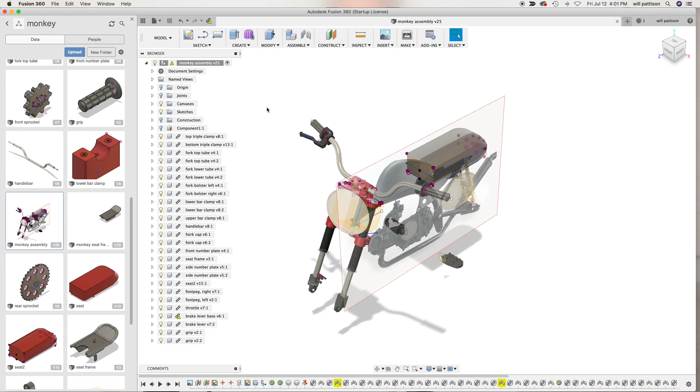Okay, let's give this a whirl. Let me first show you some parts that I've already built and talked about on my YouTube channel, so some of you might be familiar with them. This project is for my Tamiya 1/6 scale Honda Monkey, and there are quite a few parts that I wanted to customize. Not only did I not like the kit parts, but I wanted to create something totally different. So that's what's happening here. What you see in front of you is an assembly of all the parts that I've created, and they are basically referenced in space according to this reference photograph.

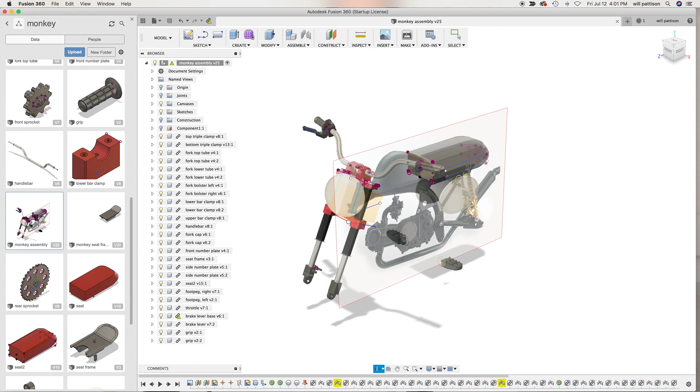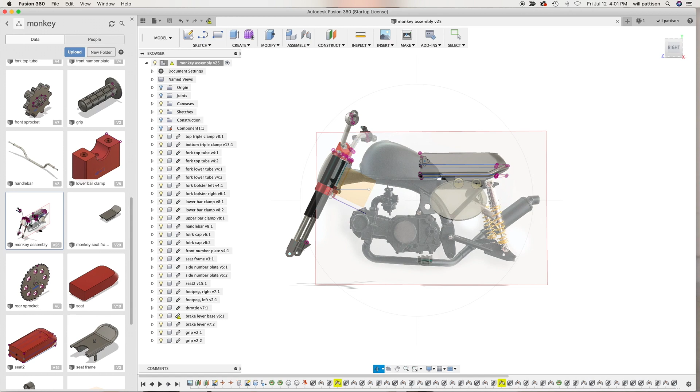This is one of the cool things you can do with Fusion 360: you can import a JPEG of whatever it is you're trying to create a model of, or use as a reference like I've done, calibrate it to the correct size, and then do your modeling around that. That's basically what I've done. Now, an assembly is basically just a collection of individual parts. If I zoom in here, you can see there's quite a few parts: fork tubes, triple clamp, lower triple clamp, fork bolsters, handlebars, grips, and you can see all of those individual parts over here.

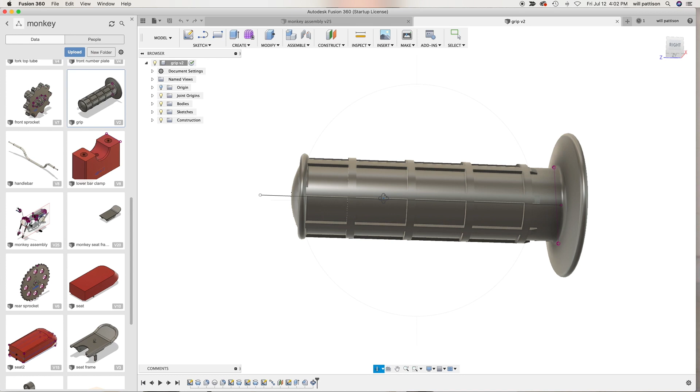So basically what happens is you design each part. Well, there's two ways to do it. One way is to design the parts individually and then join them in the assembly later. That's a pretty straightforward way of doing it. I'm not going to get into showing you how to create an assembly with this quick overview, but suffice it to say that what you do is you make these little references.

Like you can see right here, I've got a funny message from John Geigel. He runs Masterpiece Models, and we text back and forth, and I'm not going to read whatever it was he wrote there, something about lotion. That might be embarrassing. Anyway, you can see that there's a little reference point thing in here, that sort of happy mouth circle thing there. That's an assembly reference.

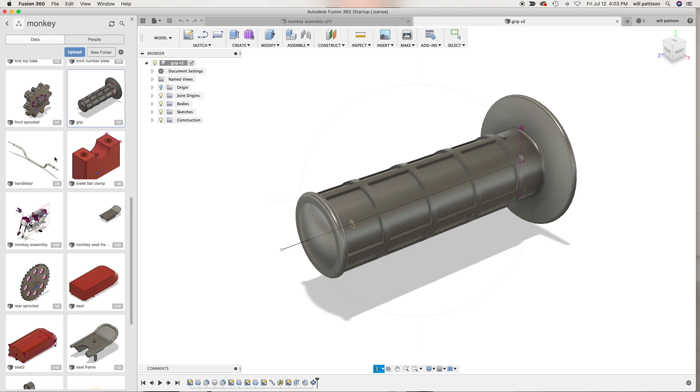What will happen is you'll mate that assembly reference with a similar assembly reference on the part it's supposed to attach to, which in this case is the handlebar. You can kind of see what's going on there. You just put the thing together the way it normally would go together, putting those mate references in so the parts join at the appropriate location.

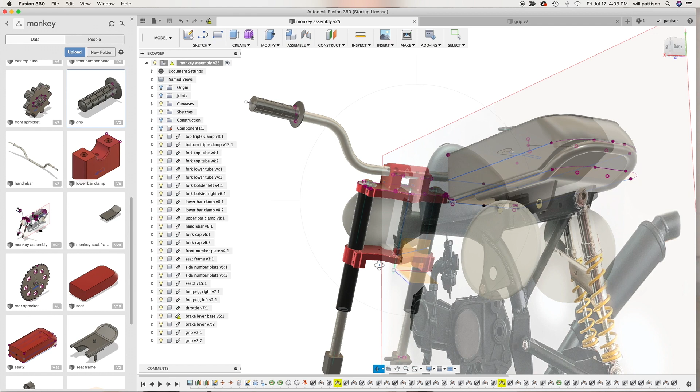But that's a whole other subject, don't want to get too sidetracked. I just wanted to show you how a collection of parts that you build works when you make it into an assembly. Now, the other way of modeling in an assembly is to actually create the assembly and model everything in situ.

So I would have had an assembly where I would have created the handlebar first. Then I would have had reference points on the handlebar that would have allowed me to start building the grip component. That can get a little bit more confusing, not exactly what I'd recommend for beginners. Assembly modeling is a separate subject, and that can be learned on one of the many YouTube videos available for Fusion 360.

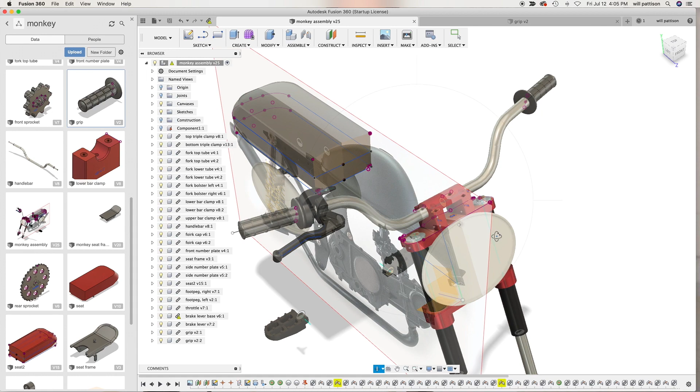The bottom line is it's not something most of us as scale modelers are going to have to do a whole lot of. I did in this case with this project because I was basically building the entire front end of this little motorcycle, so I had a bunch of parts that were going to have to go together. But if I had just been building a single component, I probably would have been able to just create it all by itself, and that's what I'm going to show you right now, how that basically gets done.

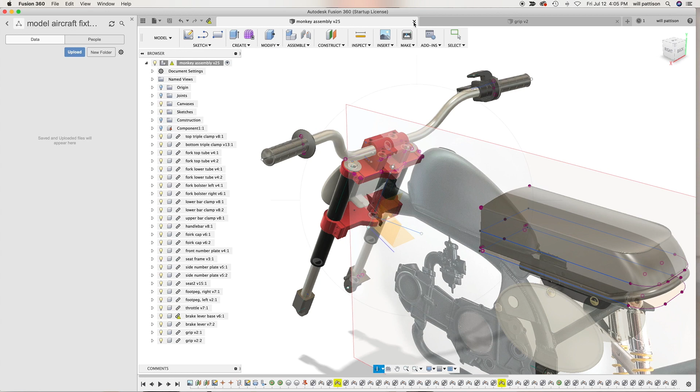So I'm going to go back over here to a folder I've just created called Model Aircraft Fixture. This is a new project I want to start on, and I need to close these things out real quickly. Okay, what I'm going to do is create a new component, a new design. It doesn't have a name until I save it, which we'll do momentarily. But this is the basic process of creating a part.

You also have to know that all the units and everything are already set up. Once you set it, for example I'm modeling everything in millimeters, and those are already set, so I don't have to turn all that on each time. What I just did there was turn on the origin. This is basically the point in space with an X, Y, and Z axis, and you can see that up here, and that references the part. Now if it's a standalone part, it's not super important where you start, but it's good to have a consistent practice of how you model things.

I always do it looking at the thing the way it would appear naturally. So what I want to make is a little L-shaped bracket. What I have to do first, and this is the way you create all parts in Fusion 360, is you start with a sketch. Since this is going to be an L-shaped bracket, I'm going to create a sketch on the side, on what would be the side plane of the bracket. So that'll be this sketch right here.

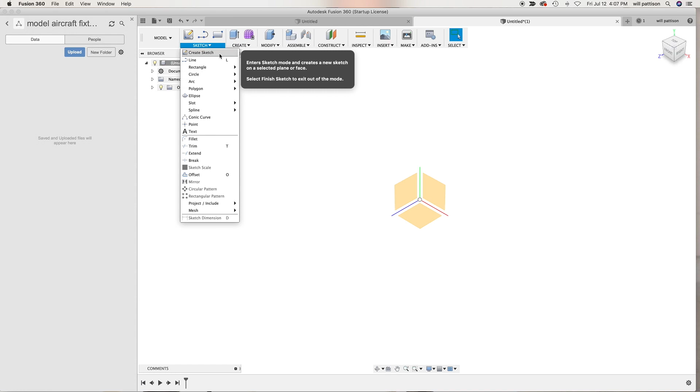So I go here and tell it I'm going to create a sketch, and I select the surface or the plane that I want to make the sketch on. You can see my units here are in millimeters. Now it's not super important at this point that I get everything exact, and you'll see why.

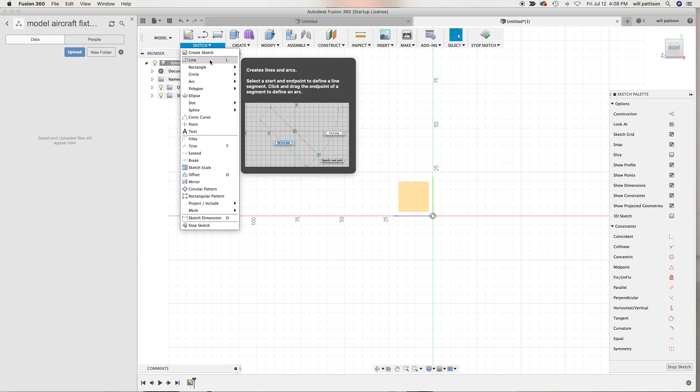So what I'm going to do now is start sketching some lines. You can go here in the menu and select line, or you can use the L key. I'm going to just start right here and go, and I'm drawing. You can see it shows you the dimensions of the line you're creating, and you just keep going and connecting lines, clicking on each end point.

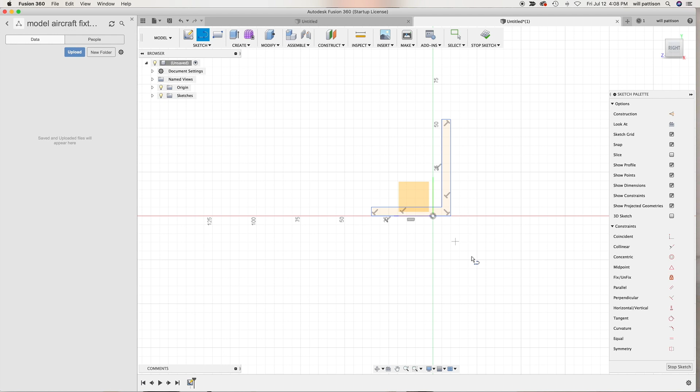Okay, so now I've completed a sketch profile, and you'll notice that everything is blue, and what that means is that it's an unconstrained sketch.

Now that's important because this type of CAD or 3D modeling, or whatever you want to call it, is parametric modeling, meaning the object is defined by a series of parameters or dimensions, and I don't have any on there yet. So if I were to modify this...

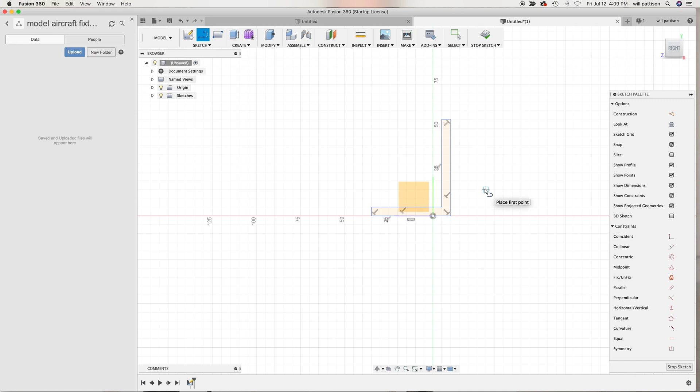it would not hold its shape, which is typically what you want when adjusting dimensions on something. So in order to constrain this, I need to add some dimensions. I'll hit the D key, and now I can put a dimension on that side. I don't really care yet exactly how big it is—we'll make that 5 millimeters. Now we'll put another dimension here, hit return, same thing with this.

Okay, now I have essentially dimensioned this entire L bracket, but you'll see that it's still blue. Why is that? Well, because it's still floating in space—it's not attached to the origin, which is this dot right here. So I need to do that in order to give it an actual location in space.

Now you can see that part of it has turned black, but part is still blue. That means the parts still blue are yet to be constrained. So what I'm going to do is pick a constraint. I'll hit escape, go over here, and pick constraints. What I want is a coincident constraint.

So I click on that, and I'm going to make the origin coincident with that line. Now what that basically told it is that this bottom edge of the L bracket must pass through that origin, and now you can see the entire sketch is black. That means it's a fully constrained sketch, and ideally that's what you always want.

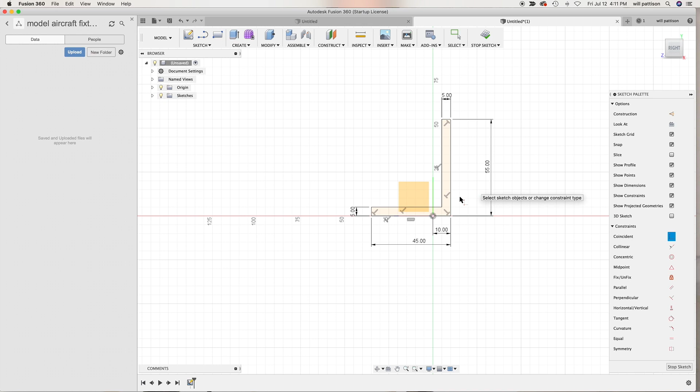So once you've done that, you just go here and stop sketch. All right, so now you can see in 3 dimensions that I have this sketch. Now if I want to turn it into a solid object, what I have to do is go here to create, and I want to extrude that thing.

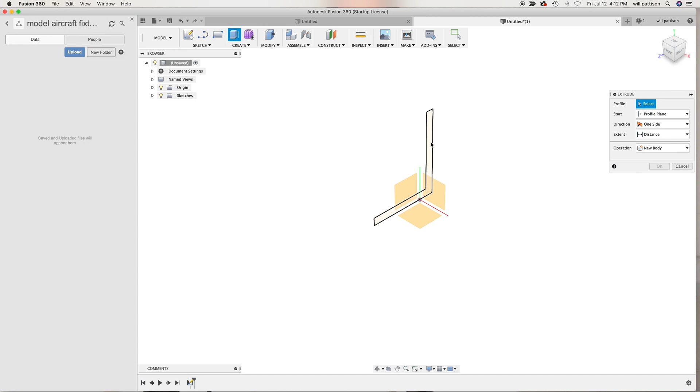So now it wants to know, what is it that I want to extrude? I want to extrude this profile. All right, this is where it starts to get fun. So now, how far do I want to extrude it? Well, how wide does the bracket need to be? All right, let's say 35 millimeters.

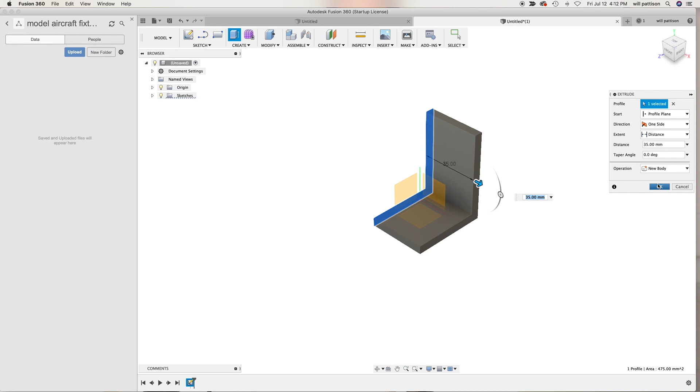That's fine. All I was doing was grabbing and dragging this arrow right here. I could have just as easily entered the dimension there or over here, but dragging the arrow is a lot smoother and faster. I'm not going to explain all these individual little boxes here—that gets into way too much detail. But suffice it to say, now I have created this little bracket.

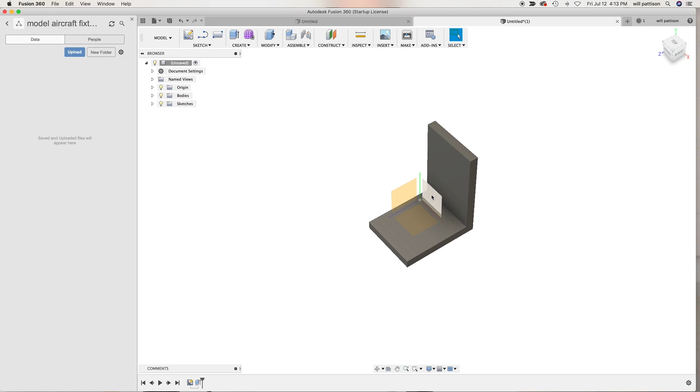Okay, so super cool. Now let's say I want to put... I'm going to need a hole in the bottom of it right here on this face. So there's a couple different ways I can do that. I can go here and create a hole, but I'm going to show you the basic bulletproof way of doing it.

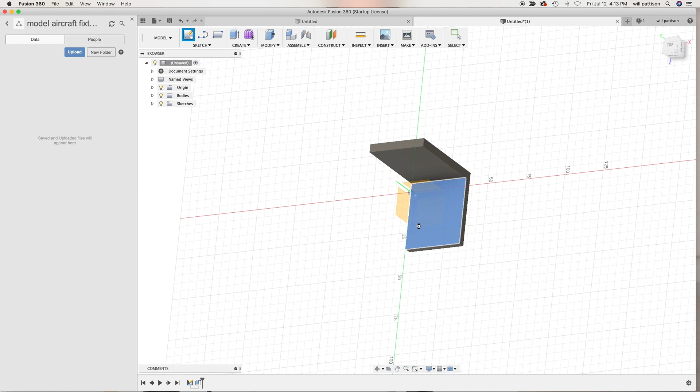We're going to create another sketch, and this time it's going to be on this surface. Now see it automatically rotates to the orientation that allows me to look straight down on that surface.

I want to create a circle, so I hit the C key, and I'm going to just create that. I don't know how big it needs to be, let's call it 10, so I'm just typing in 10 millimeter, and there we go. I have a circle there, but you can see it's totally unconstrained.

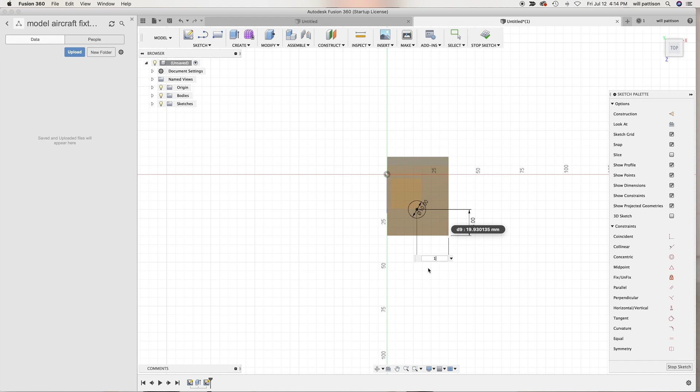So I'm going to hit the D key. I'm going to dimension from the center of the circle to that edge, and let's make it a nice round number of 15. Then I'm going to go from the center of the circle to this edge, and again we'll make it, let's see, that was 35. We want it to be in the middle, so 17 and a half. And now you can see that the circle is completely constrained.

So I'll stop sketch, and I'm ready to now go here, and I want to create an extrusion. Now you may say, wait a minute, how is it going to be an extrusion if it's going to be a hole? You'll see.

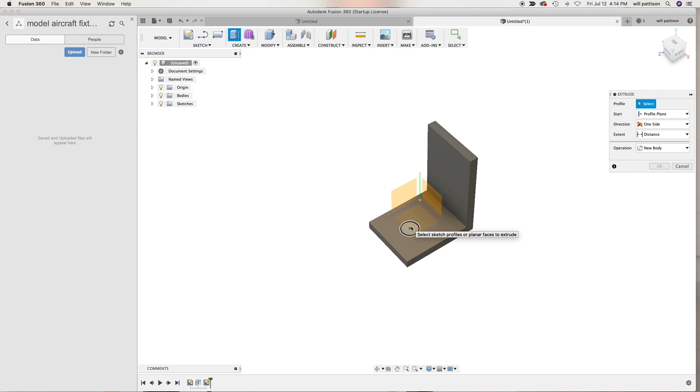So I'm going to select that profile. Now look right here at my operation. It can be a new body. If I did that, I would have a little cylindrical nub sticking out of that surface, and that's not what I want. I want to make it a cut.

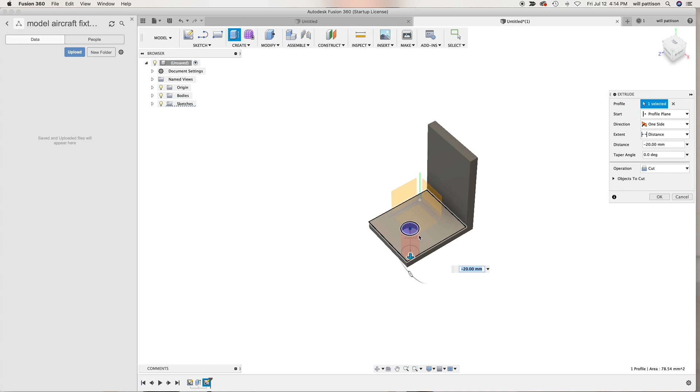Now I'll just take and drag that arrow the opposite direction. Doesn't really matter how far as long as it goes all the way through. Say OK, and boom. Now there is a hole in that bracket.

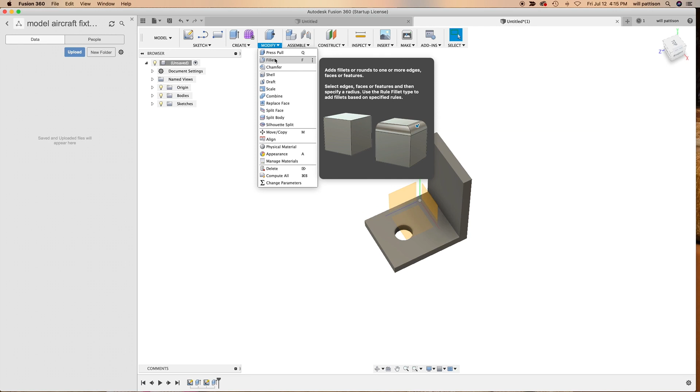Now, if I want to clean the bracket up and make it look more dope, let's say that I need to put some fillets on it. So I go over here, fillet command, and let's say I think I probably need a nice radius on the inside of that corner. How much of a radius? Let's say 2 millimeters.

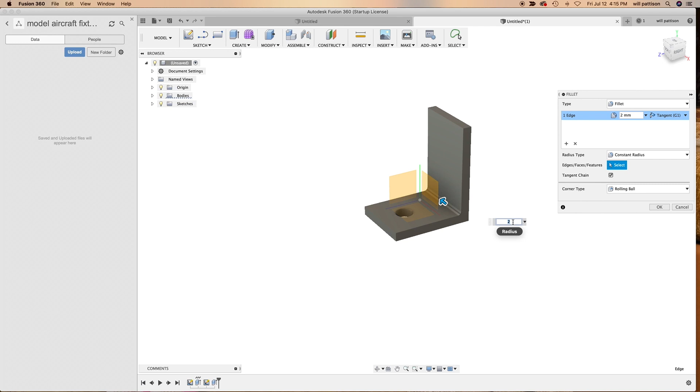It'll show you what it's going to look like, and you can rotate it there. I'm using this on a Mac, and that's one of the great things about this, since it's web-based, you can use it on any platform. But the reason I mentioned that is because my controls don't work exactly the same as yours might if you're on a PC. But let's make it a 5 millimeter radius, that looks more cool. So there we go, 5 millimeter radius.

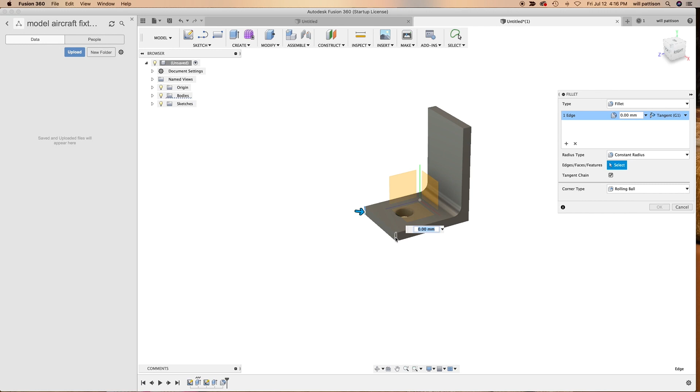Now let's say I want to put a radius on these outside corners. So I'll go back again, or I can just hit the F key for fillet. And I'll click that one, and that one, and that one. Whoops, don't want that one. Let's unselect that, then reselect that edge. And I want these to be 3 millimeter radii. So, and then I'll click OK. There we go, that is a neat little bracket.

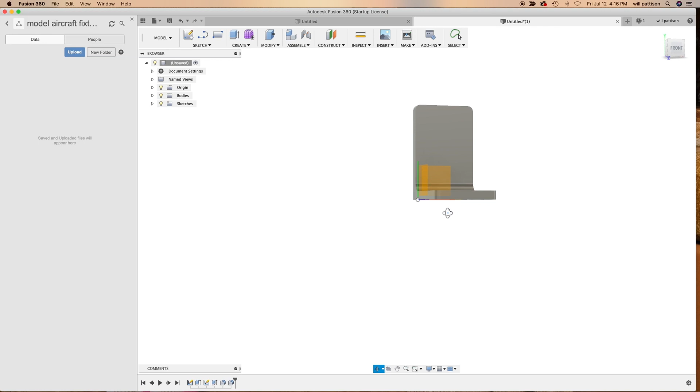It's obviously going to need, I think it's going to end up needing a slot in this face. So let's do that real quick. That's a little bit more challenging.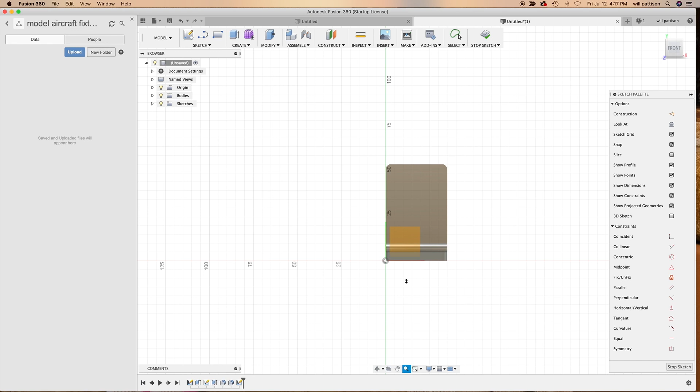Okay, let's create a sketch on this face here. Now this is going to need to be a slot. So I think a good thing to start with is a rectangle. So I'm going to hit the R key, and it's going to let me automatically define a rectangle like that. I don't think that one's going to work.

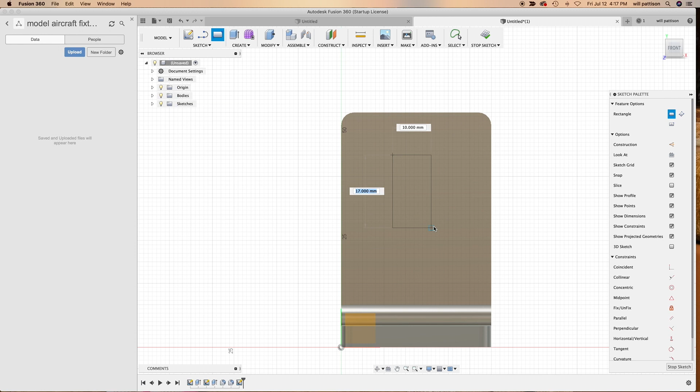So I hit escape to get out of that. Needs to start a little further down. Whoops, don't do that. R key, start a little further down and do that. Okay, and click. So now I've got a rectangle of some arbitrary size, but it's going to be a slot for a screw.

And so it needs to have a radius on the top and the bottom. So I'll go over here and I'm going to sketch an arc, and I'm going to go from center point. It kind of knows that I want that center point to be in the middle of that line segment, so I'll click there. Then I'll click here, and again, it's going to kind of help me out.

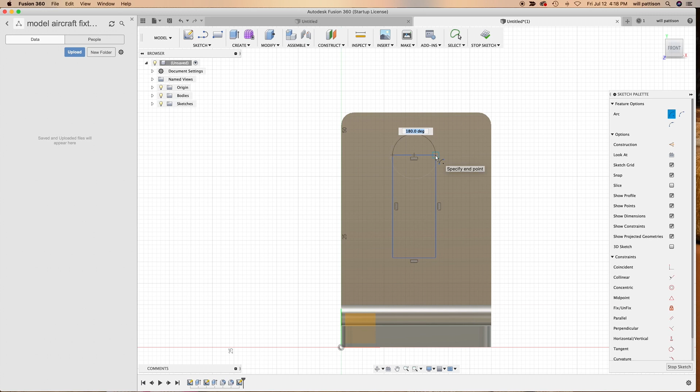It knows that I probably want it to intersect my rectangle along the sides there. So same thing here. Click the center, click here, click over here. Okay, now I have some extra line segments that I need to get rid of.

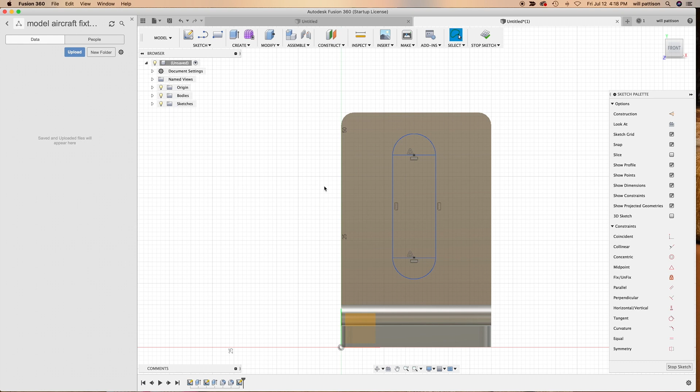So hit escape, get out of that mode, hit T for trim, and I'll click that, and I'll click that, and those now are gone. Now I got a little warning here. You don't have to worry about that. That just means that some of the constraints that were there when I created the rectangle are now gone, but that's no big deal because I'm about to constrain this thing with some dimensions.

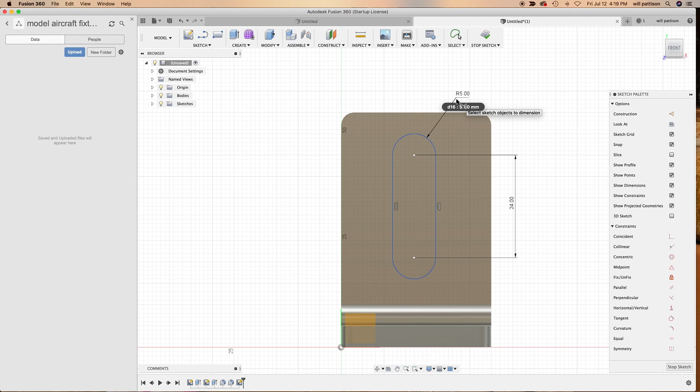So I'm going to dimension from the center to center of the arcs. I'm going to give it a radius on this arc. That's pretty good. So now the slot itself is dimensioned, but it needs to be constrained relative to the bracket itself. So we'll do that.

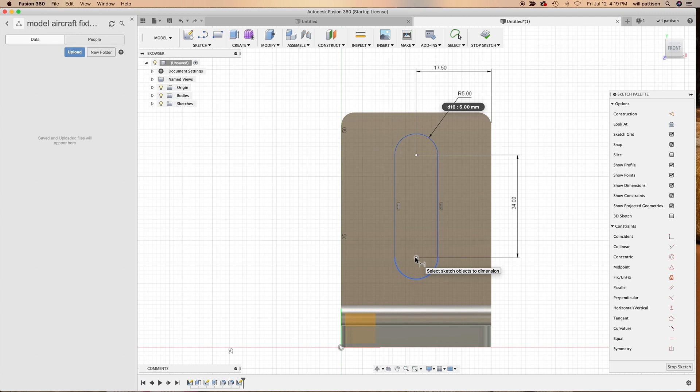That needs to be 17.5, so it's in the middle. And you can see that you have to do a little bit of math sometimes. And that can get sort of frustrating for people who aren't really used to it. But that's just the nature of parametric modeling. And that's what differentiates, I guess you can call it, engineering from just freeform modeling like you might do in something like ZBrush or Rhino, where all it has to do is kind of look like the thing.

Now, I've got a little bit of a puzzle here. What have I failed to do? The thing is not completely constrained. Oh, it doesn't understand that these arcs are going to be the same. That's one thing. So let's do this. Equal constraint, and we'll click here, and we'll click here, and now it knows those two arcs are the same, so that's good. All right, now it's got these symbols here.

Those mean, as you can see, that those are horizontal or vertical, but it does not know that they are equal length. So let's also use the same equal constraint. And oh, still didn't get it. They're parallel. They have to be because they are both vertical. So...

Why are they not? Let's see. Maybe we need to make sure that they are tangent. That might do it. There it is. So you can see that this sort of gets into, you have to do a little bit of problem solving. The reason that thing wasn't fully constrained was because it did not understand that the arc and the line had to be tangent.

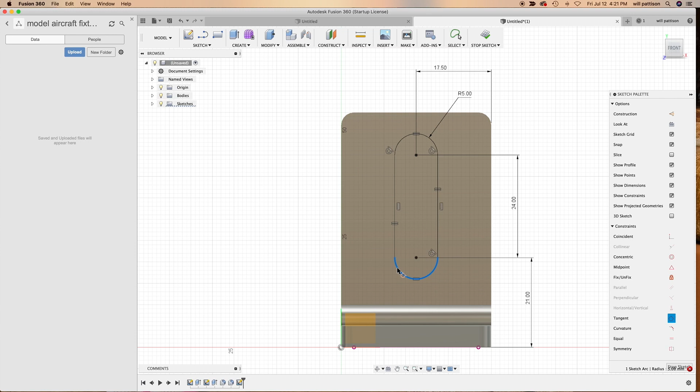See, sketch geometry is over constrained. Basically, what that means is that mathematically, this is sufficient. You don't need that additional tangency constraint. So, at any rate, that's constrained.

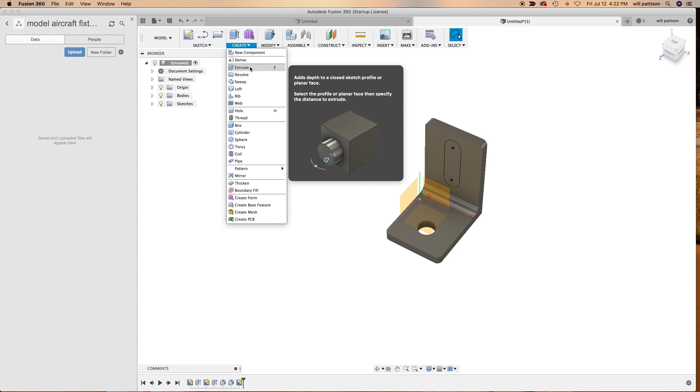Now let's create, let's go here, create an extrusion. But, of course, it's actually going to be a cut, and it needs to go through it that direction. Okay, and there we go. There's a bracket with a hole and a slot.

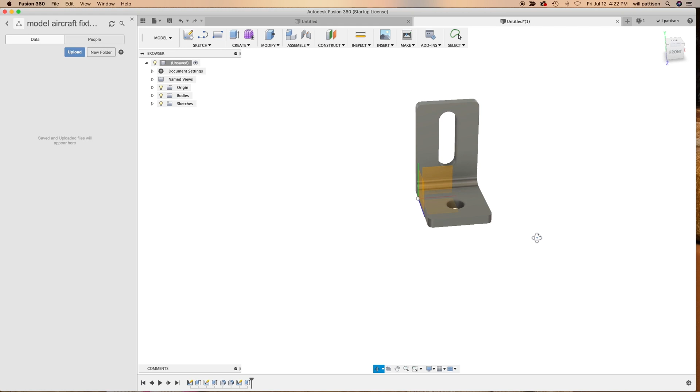All right, and I'm going to stop there because I think that's a pretty good overview of what it takes to create something. It can get obviously way more complicated than this. There's a whole bunch of things that you can create, and we could spend a long time going through all these menus. But again, that's what YouTube is for.

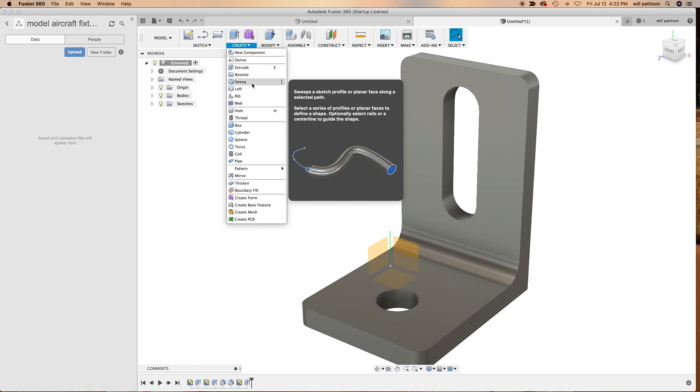There are thousands of hours of video tutorials on YouTube that will help you out, and the software itself is pretty helpful. Like you can see, it tells you what a thread is. I mean, you know what a thread is, but it gives you a little bit of help. Like what's a loft? It shows you that it's the joint surfacing between a couple of profiles. A sweep - you take a profile and you sweep it along a path. So the software itself is going to help you figure out how to use all these tools.

But all I really wanted to try and show you guys with this was just a little bit of the basic methodology for creating parts, because that's where it all starts.

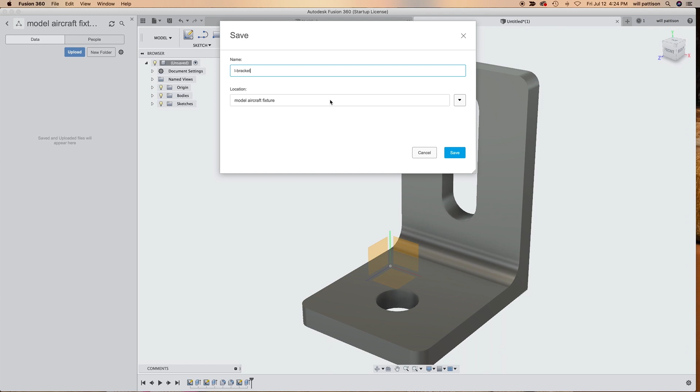After I started editing this, I realized I forgot to tell you guys one of the most important things. I talked about using good dimensions and a constrained sketch so you could modify the thing later if necessary, but forgot to show you how that happens. So I want to do that real quickly.

Let's say we've decided this bracket needs to be taller. If I click down here on my feature tree, I've got each thing that makes up this body, and the sketch is one of them. Let me double click that, and it puts me back in sketch mode.

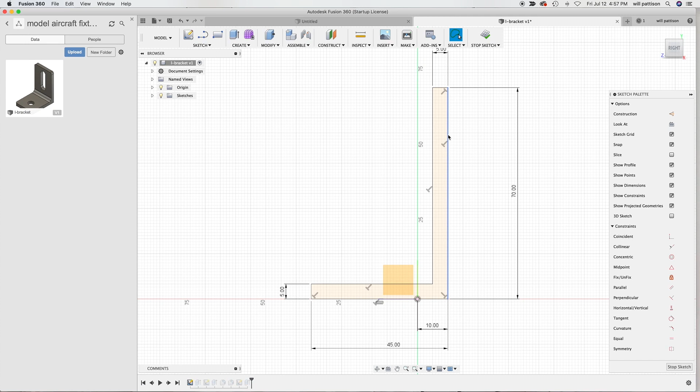Let's say I need to make it taller, so now let's change this from 55 to 70. There, you can see I've changed the height of it and nothing else has been affected. That's what you want, that's the only thing I wanted to adjust.

Now you can see the height of the bracket has changed, but my slot is still in the same spot. That may be okay, but chances are the slot should really move with the height of the bracket. So let's undo this change that I just made.

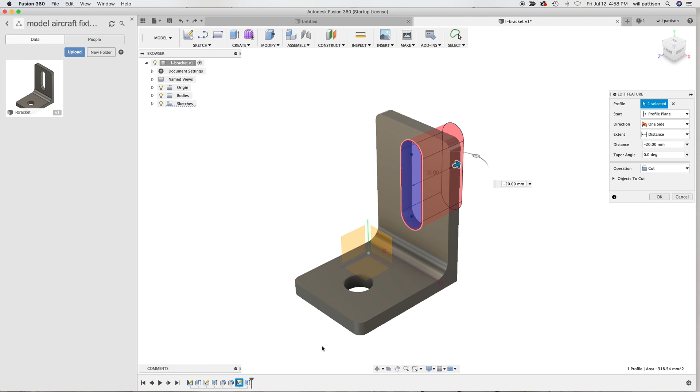Let's go into the sketch that defines the slot. Hold on, I'll get us there, I promise.

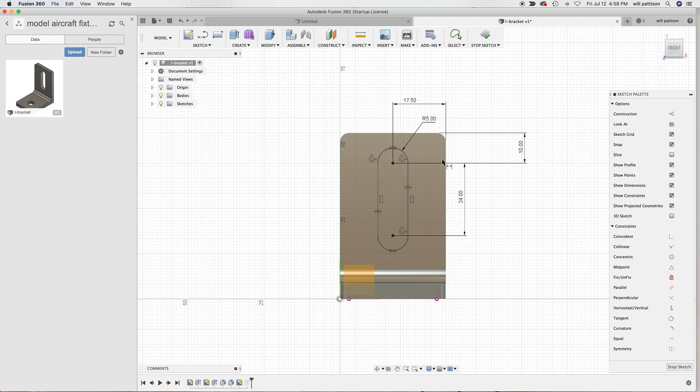Instead of dimensioning the slot to the base of the thing, let's delete that dimension and dimension it to the top edge instead. You can see it's still constrained, everything's still the same, but now it's referenced to the top. So this time if I change this to 70, you can see the slot traveled with that top edge, which is probably what I want.

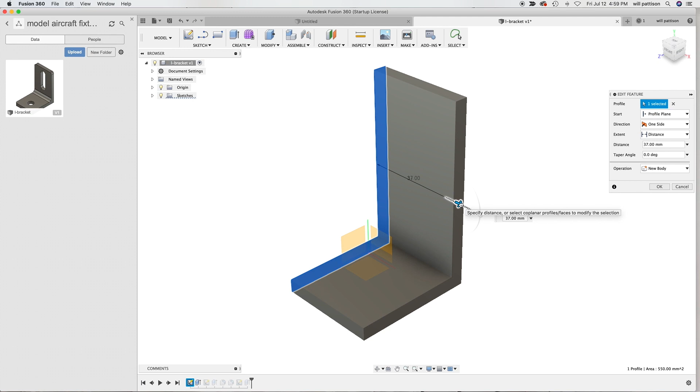So that's good. But now let's say I want to change the width of this thing. Let's go here to the extrusion, and you can see it goes back to this point, and I've got it at 35. Let's say I'm going to make it 40.

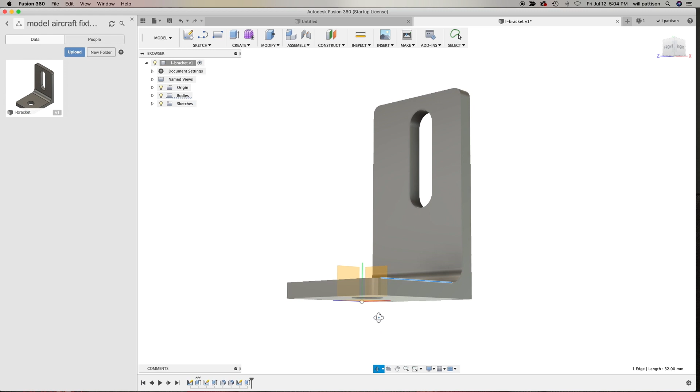I had some kind of technical problem there and had to restart QuickTime. Anyway, you can see this is now goofy because I've changed the width of the thing, but the hole and the slot are no longer in the center because they're dimensioned to this edge, so they traveled with it, putting them offset.

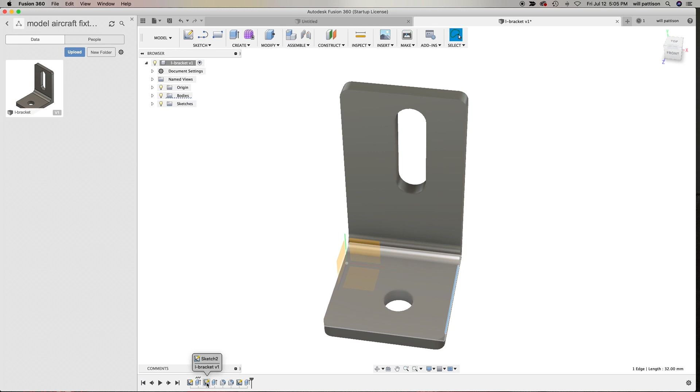So if I wanted to fix that, I'd have to go in and redefine those sketches so the dimensions were changed. I'd go here to that sketch and just change that dimension to 20, which is half of 40. That moves that hole over to the middle.

So we don't have to go through all that. Hopefully you found that useful. If you've even been considering doing this, it gives you an idea of what you're up against. I know it can be intimidating, and the learning curve is kind of steep at the beginning. But as I've said, there are thousands of hours of really good tutorials on YouTube.

There's a guy named Lars Christensen who is fantastic, he does lots of videos showing how to use Fusion 360. Autodesk themselves have free webinars you can sign up for if you really want to get into it. And there's a really good Fusion 360 Facebook group as well where people can answer your questions. So there's no shortage of resources on how to learn to use the thing.

It's free, and it makes it possible for you to 3D print just about anything. So why would you not want to check it out if you're at all interested in building your own parts? So I'll shut up now, I think that's about all there is that I can really say at this point.